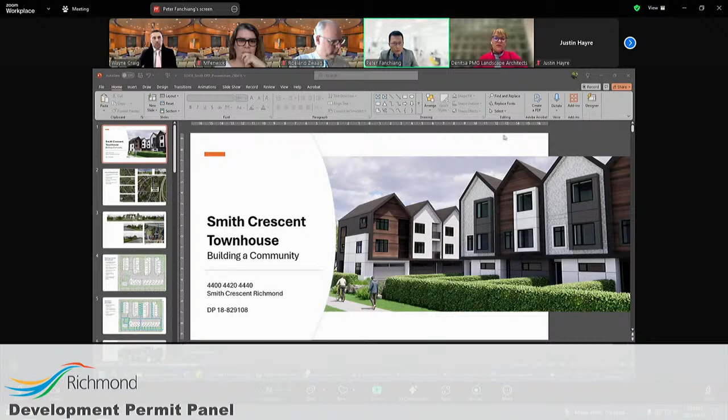My name is Peter Fanchiang, architect, AIBC, and good afternoon, thank you for the opportunity to speak with you today. I'm here to present our proposed townhouse project, let me share my screen right now. Okay, thanks, we can see it. So everything is all right? Yes, thank you, great.

I believe this project will not only contribute to the city's goals around increasing residential density, but more importantly, will help create a beautiful, family-oriented community for 34 families. This project is designed with people in mind, and it's about building a place where families can truly thrive.

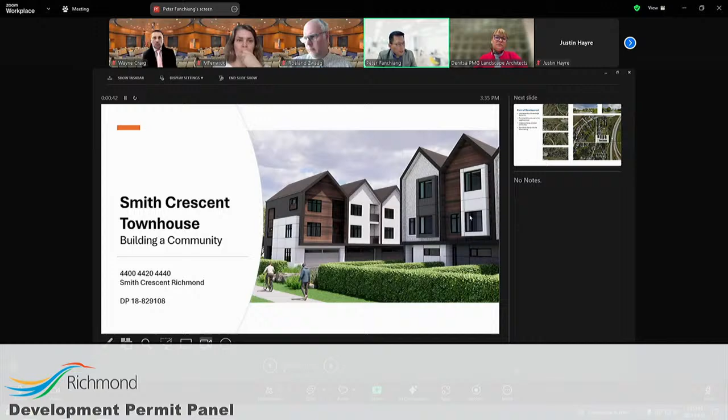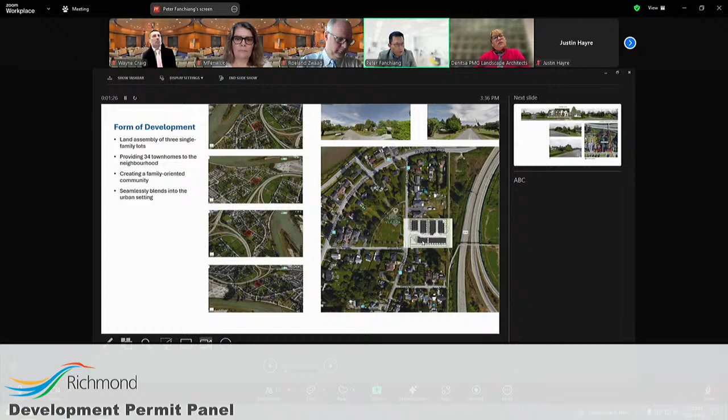There's also Hamilton Park here, so pedestrians can truly walk around this project. These are some street views, and we provide a key pedestrian connection between Hamilton Park and the trail path on the east side of the project site.

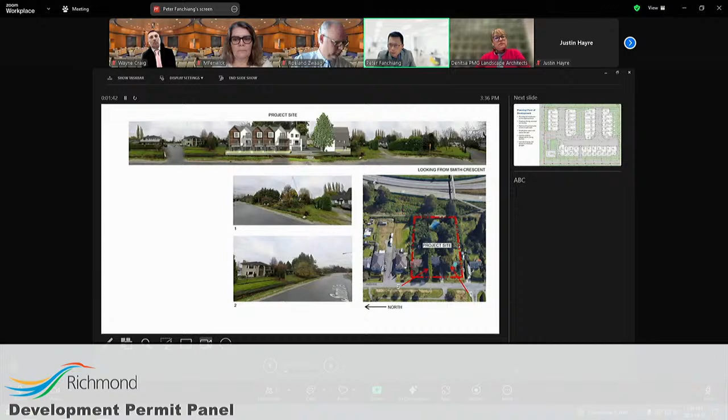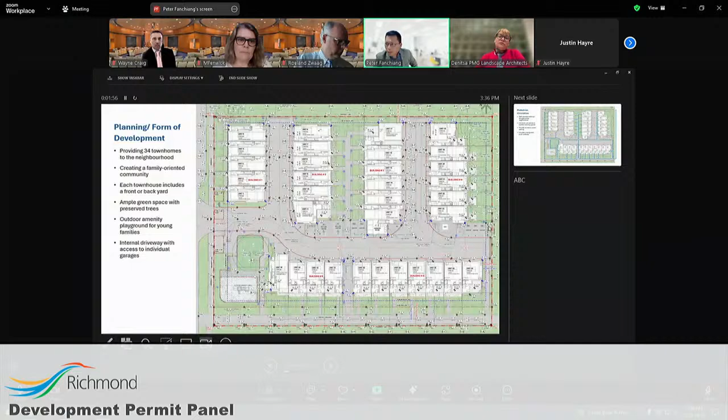So this is a site plan. We have an internal driveway that provides vehicle access to each individual garage, and internal pedestrian walkways are designed with contrasting paving colors for clarity and wayfinding.

You can see that residents can walk around the project and through the community. We've considered how to bring people in, so they can walk through each townhouse unit, with the circulation path indicated by the blue arrows.

This is a 3D view looking from Smith Crescent, which is the main entry of the community. The internal driveway comes from Smith Crescent into each individual townhouse unit.

We also have central garbage rooms for easy access for waste management, and the outdoor amenity space includes a playground for families and children, here. There's also pedestrian-oriented lighting for safety, including street lights, bollard LED lights, and wall-mounted sconce lighting throughout the community.

Each home has its own private front yard, located on the opposite side from the parking garage, so it's pretty much separate and people can enjoy quality time in their front yard without seeing vehicles traveling and entering the parking garage.

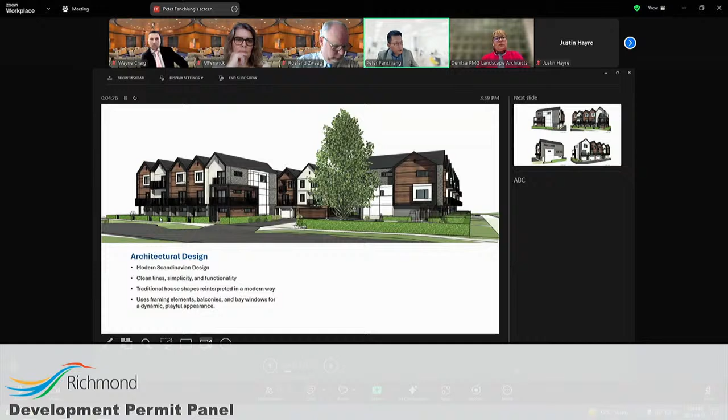This is also looking from the main entry from Smith Crescent into the community. You can see the big trees are preserved here, with an amenity space and playground for families, and a front yard fronting Smith Crescent.

Some 3D views showing the architectural language with two different color schemes: one lighter scheme, more like white shingles, and another darker scheme with more wood textures.

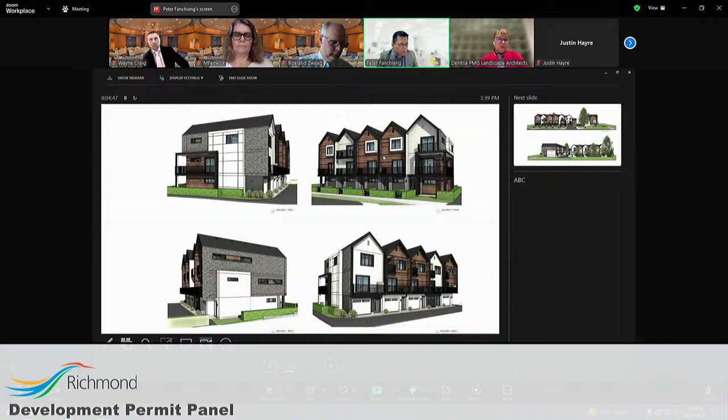Based on these two color schemes, we made a visual arrangement so that each building, from building 1 to building 6, has its own character.

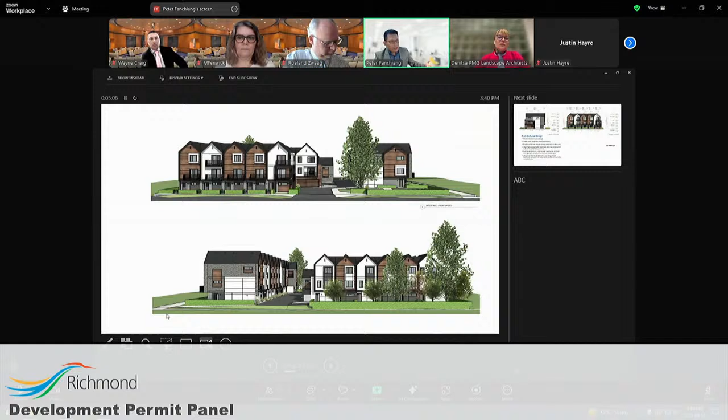This is looking down from the main entry, and this is on the opposite side. From the east side of the property, this is the trail.

Now introducing the elevations from building 1 to building 6. Based on similar language and elements, we created an arrangement with different patterns—dark color scheme, lighter color scheme—creating different visual interest.

Some units have bay windows, and we have different configurations of balconies.

Although they share the same language, based on this arrangement we made each building have its own character, and some units have slightly different window designs to give them more character.

This is building 4—although it has a bay window, it connects from level 2 to level 3. Building 5 is slightly wider than the other townhouse units, with a slightly wider bay window design.

Material-wise, the design focuses on a minimalist architectural approach, with emphasis on durability and sustainability: wood grain fiber cement siding and shingles, and a Scandinavian-inspired color palette. The lower level will be ledgestone, and the upper level will be pre-framed with the same architectural language, with slight variations to make each unit different.

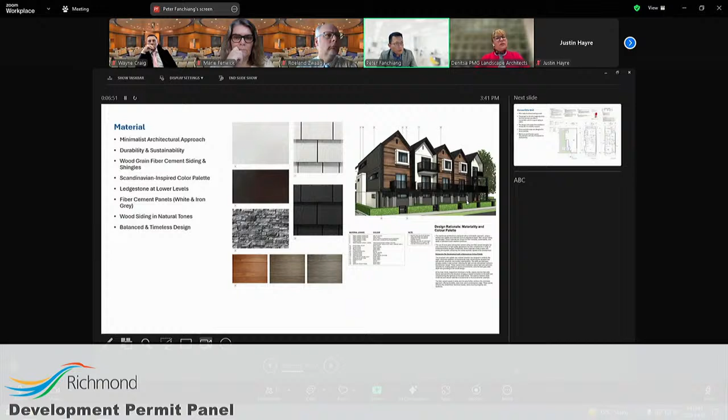We also considered senior residents in the community, so we have 3 convertible units supporting aging in place, accommodating and complying with accessibility space requirements.

These units are slightly bigger than the typical townhouse units, and the spaces were designed to comply with clearances for wheelchairs and accessibility doorways, and most importantly, we have a stair lift.

The stairs will be able to accommodate future renovation to add a stair lift, so the senior person can sit on the stair lift equipment to travel from level 1 to the level 3 bedrooms.

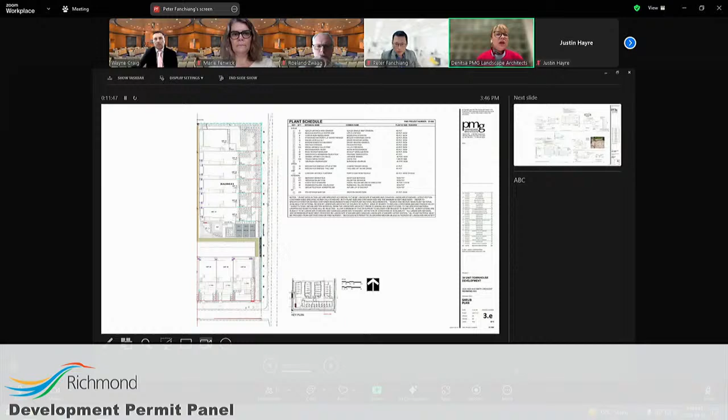Sorry, Denitsa, if I could just interrupt. Do you have a blow-up image or a different slide that would have more detail? Yes. Peter, please, could you go down? We have an enlargement up. Yes, okay, yes, it's black and white.

So we chose actually play equipment which is wheelchair accessible, and multiple kids can use it. The age range is between 18 months to 5 years old.

And because we are providing that log sitting type area, even older teenage kids can use it at the same time. So it's a pretty big play area with multiple activities like sliding, climbing, imagination, balancing, or just socializing.

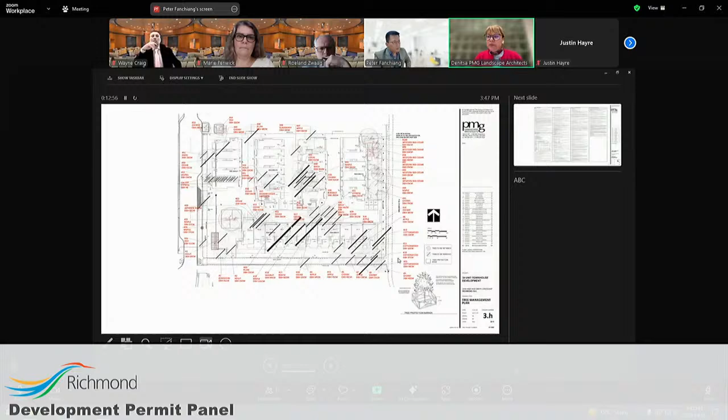Permeable pavers in 3 different colors have been used for the driveway and for visitor parking spots, which again soften this big paving area and divide it into different sections, providing more visible pedestrian access between the amenity space and some units' entrances, and the mailbox location.

And this is pretty much everything for the landscape proposed for this project. I'm open for questions. All right, thank you very much.

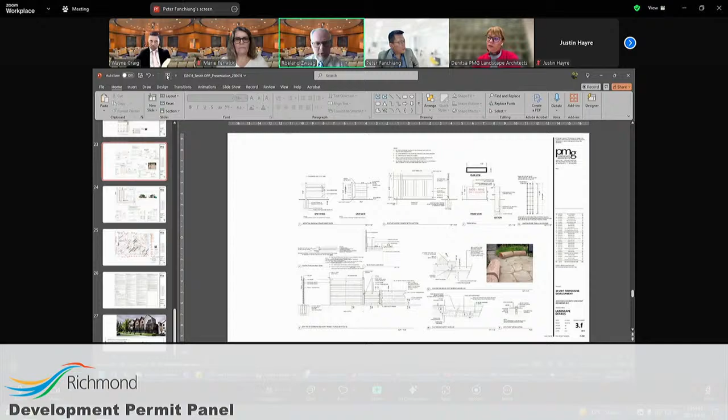When you mentioned fencing on the west side, looking at the rendering, the west property lines are essentially the end of the backyards or front yards, so I didn't understand why a 6-foot fence would go there. Oh, west, east side? East side, okay, sorry, yeah, east. If I said west, my apologies. East side. Yeah, absolutely, yes, thank you.

A follow-up question: you mentioned a retaining wall. That retaining wall is at the end of the 6-meter strollway, and it's going to be removed when the property to the south develops.

I'm seeking clarity on what's proposed and why a retaining wall is needed, or whether it's existing. It's been designed by civil engineering, as at this moment there's a grade change between the two sides, and our site is a bit higher than existing grade. We're proposing a small retaining wall to retain safety and divide the property line between the two sides, which is why we're providing 1 meter fencing along the south.

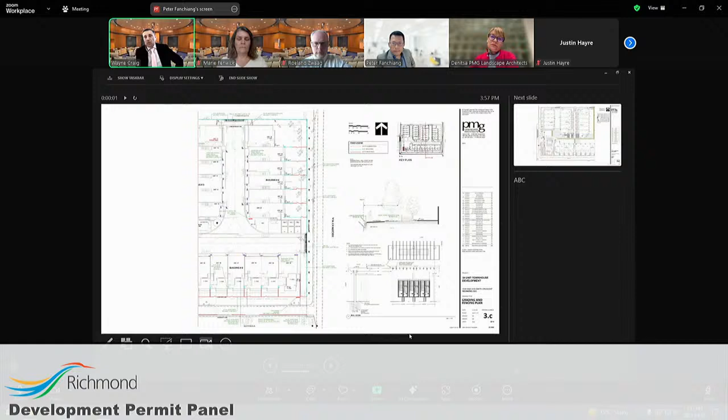Josh, maybe if I could ask you to comment on the strollway along the south property line, how the existing condition would be through this development, and then how that would be changed in the future, and if with that you could just confirm that the walkway itself will be fully accessible from Smith Crescent to the trail on Highway 91.

Through the chair, the retaining wall proposed is along the south property line of the current property. Upon redevelopment of any of the lands to the south, those lands would also be raised in order to meet the grade of the proposed walkway on the site.

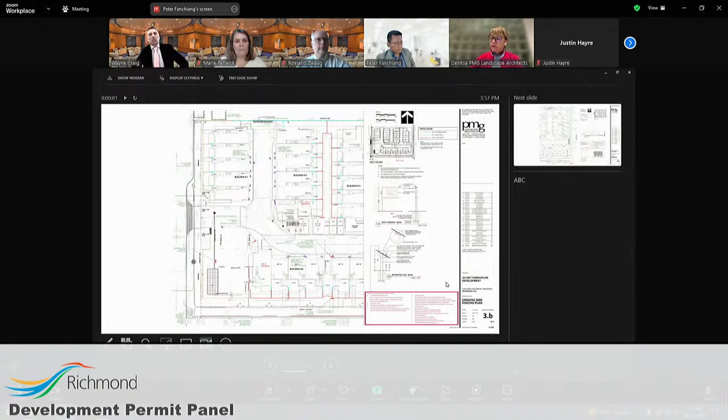The strollway is envisioned as having an ultimate width of 12 meters. There's a 6-meter wide SRW being provided on this property, and that would be expanded by 6 meters on the property to the south to have an ultimate condition of a 12-meter wide strollway connecting between Smith Crescent and the Highway 91 trail, all at the same grade and level. There would be no change in elevation that would require any steps or ramps.

And the fencing that's proposed now is essentially for the privacy of the adjacent property to the south, while it is maintained as a single-family residence, correct? That's correct.

Roeland, does that answer your question? Thank you, Mr. Chair. Thank you to staff and the applicants.

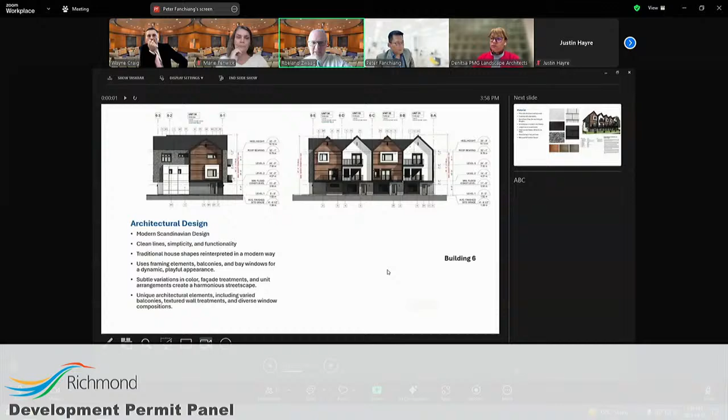One final question, I think the architect mentioned a central waste location, but I don't know if I understood that clearly because I don't see that on the drawings either. Okay, that's actually right here.

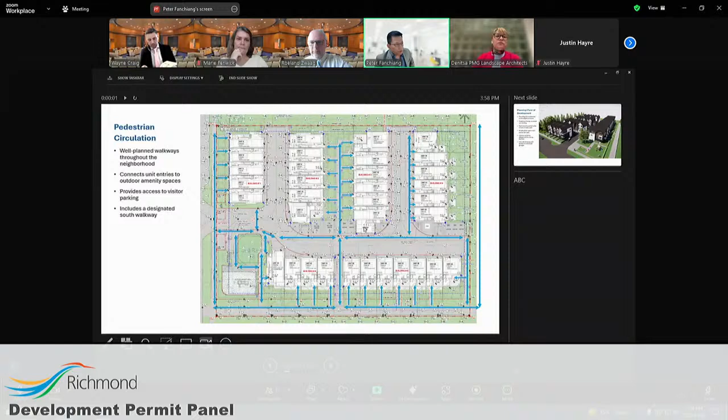So there's building 1, 2, 3. It's at the very end of building number 3. And if you see from this rendering, so it's right here. Okay, thank you, it's an enclosed area. Thank you so much.

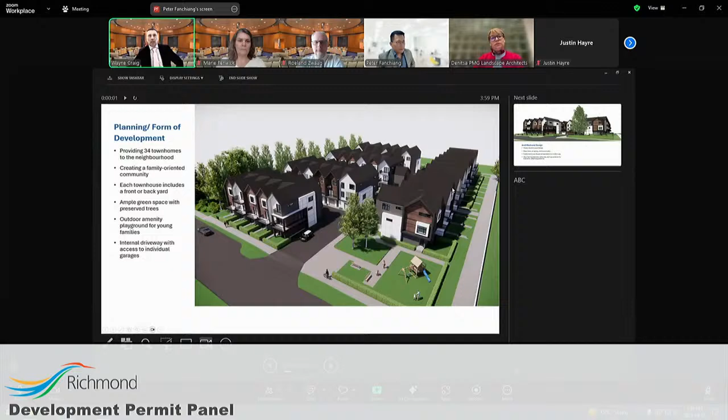I do have one question in relation to the landscaping, and I'm looking for some comment from the landscape architect. I appreciate the efforts made to retain the existing focal tree adjacent to the amenity space, the existing trees in the northeast corner of the site. I'm just wondering if you could comment on how the retention of these trees is limiting your ability to provide additional on-site replanting.

This project has quite a low lot coverage. There seems to be a tremendous amount of green space being maintained, but we are providing a number of the replacement trees through a cash in lieu contribution. So I'm just wondering if you could comment on how the retention of those trees is placing or influencing your replanting plan.

For areas in the tree protection zone, we are retaining the existing grade, and we are removing a 6-inch maximum by hand of existing landscape, and planting small size plants. Under the trees we have an existing lawn, it's not very well developed over the years. That's why for those units, for building 4, we are providing a patio area which owners can use, and the rest is planted or we are replacing.

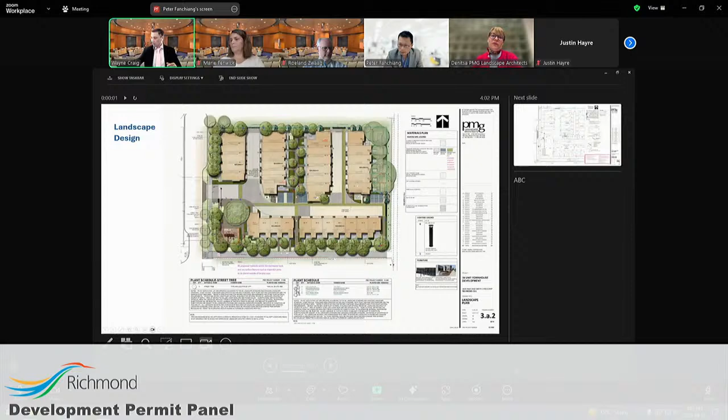I understand we have an interested party that would like to potentially address the panel. Yes, Mr. Chair, there's a member of the public here wanting to delegate on this item. All right, if you could welcome them to the podium and just ask them to provide their name and address for the record and whatever comments they may have.

Good afternoon, I'm Gordon Hoy, and I am the property owner, my wife and myself, of the adjacent property to the south, 4460 Smith Crescent. We noticed last year, once the preload had been put in, that whenever it rained there were huge puddles in our backyard, and we couldn't use the yard anymore until that drained. It took a couple of weeks for this to drain.

What we're wondering is what is the company going to do to address the drainage issue of the added weight and therefore the push of the water to our side? Is there some kind of drainage, some kind of piping? We would like to know what their plan is for mitigating this problem.

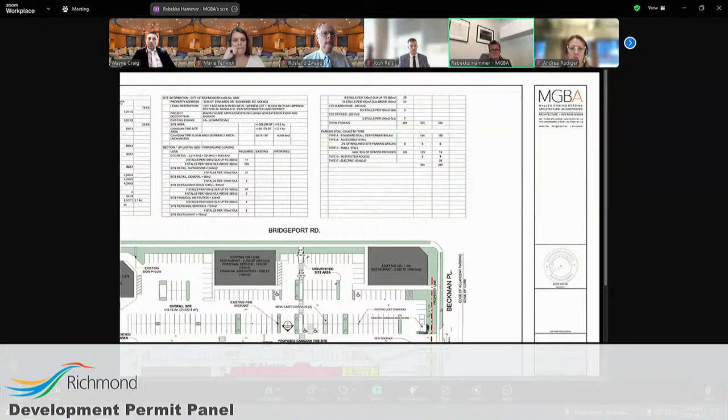The existing site, this is an existing drawing. Actually, I'll go back to that. Sorry, I don't use Zoom very often, so I apologize.

This is the site, the proposed work. We've introduced new pedestrian crossings. The bulk of the work has been addressing this parking field out front, adding landscape and accessibility connections throughout the site, and allowing for some e-com parking stalls out front, and then additional bike parking provided here.

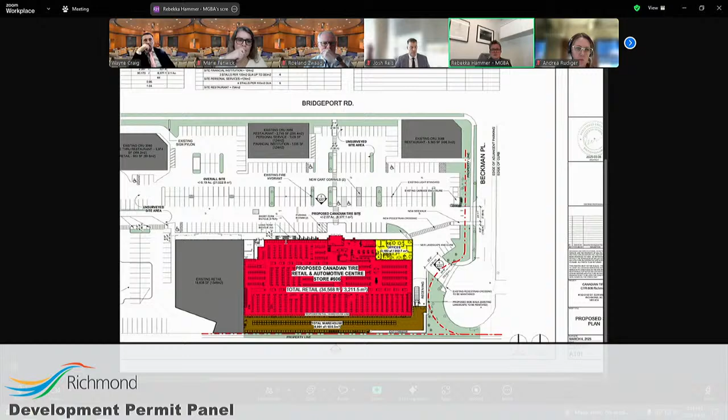The facade improvements are, again, keeping with that Concept Connect design guidelines. Moving from left to right, the loading will be reworked to provide a recycling compactor, and then maintain the truck bays for truck loading.

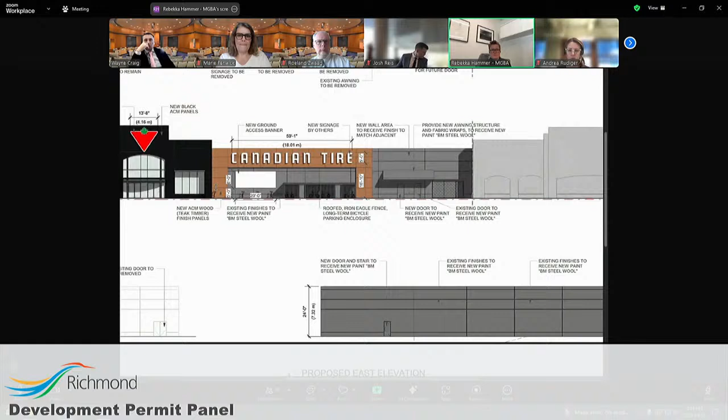The provision of awnings: currently at the Brick, there are awnings, and we understand that this is a requirement. There are some typical Canadian Tire signage, mounted here. The entry feature, the Brick entry feature, would be painted in our standard black with a nice logo up above, and then moving this wood element to the right of the building, and tucking in the bicycle parking, both secure and typical racks.

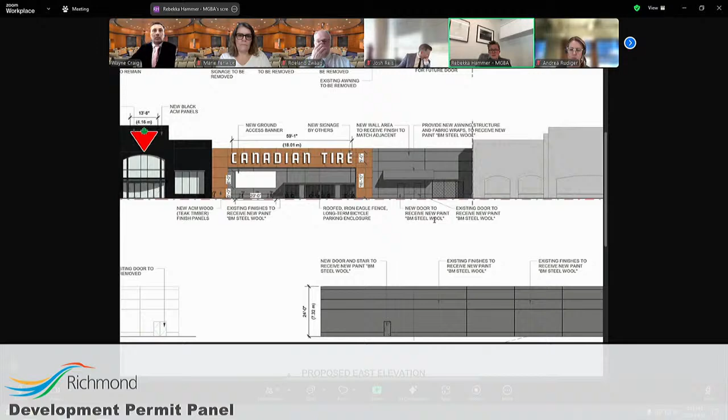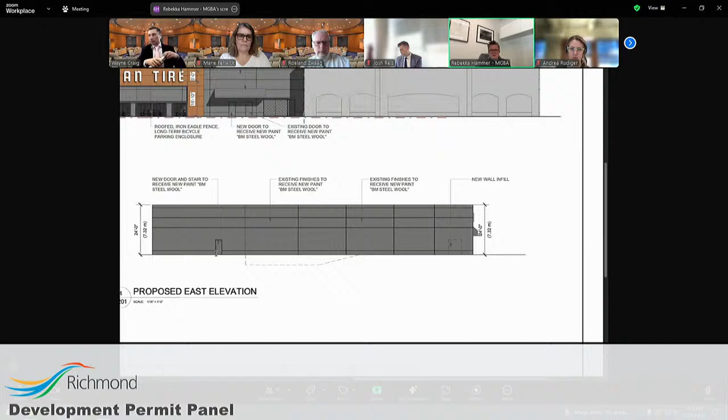Here, the east elevation remains unchanged, with the exception of a new door to provide exiting for the rear of the building. We found that the exiting distances required the provision of a new exit at the rear. And then there is an existing door here, which would be infilled. On the rear of the building, new signage and new paint. And that's the extent of the facade work.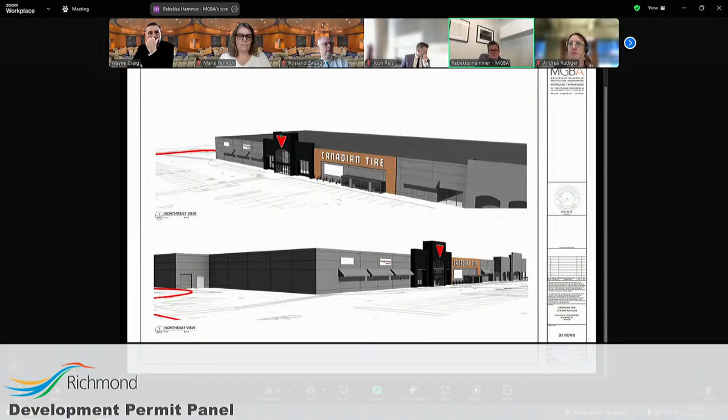I have a couple of renderings here showing the approach. And then here is the proposed landscape work. To allow for the Canadian Tire standard truck, we were required to cut back the curb here, and that's where you'll see the loss of these trees. It was just for the clearance around the corner, to make sure we weren't infringing on any street parking. And then the new parking islands with trees, I believe they are deciduous, and then there are some shrubs and lower, smaller scale plantings. This work is proposed in the areas directly surrounding the store.

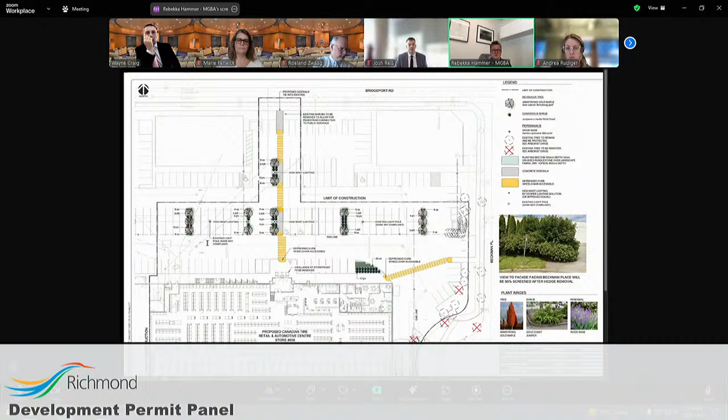Now, I wanted to zoom in on... apologies.

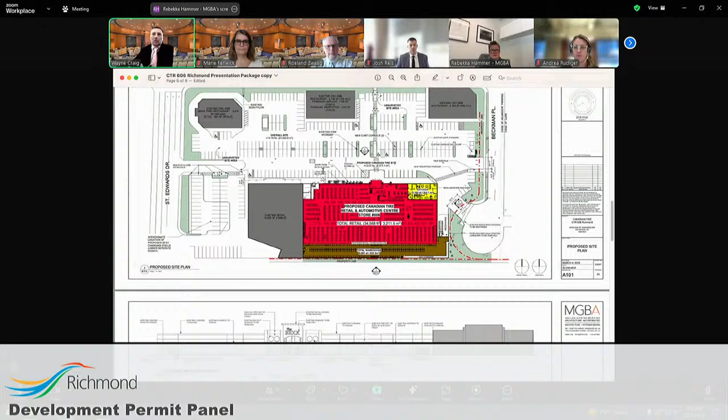One of the requests during our discussions with the city has been maintaining accessible clearances from east to west. So we have introduced a new crosswalk with curb let-downs. We actually took out parking and enlarged this front pad area to allow for wheelchair access through there. The bicycle parking and lockers all provide that minimum 1.8 meter width.

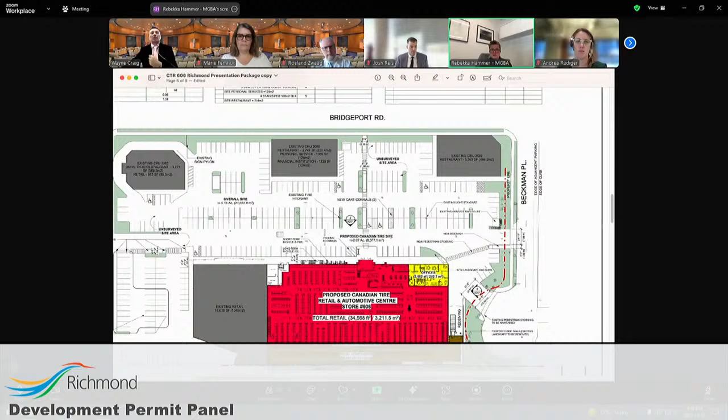And then as far as continuing that path all the way to St. Edward's, likewise there was no path here before, but we're proposing bringing one through here. And that is the extent of my presentation. Thank you very much.

I think we have a good picture as to what is being proposed.

Josh, any staff comments? Just a few comments, if I may, Mr. Chair. So landscaping improvements, as indicated, are proposed within the parking areas. This includes the planting of 14 new trees on site. In addition to widening some of the sidewalks and creating those connections north, south, east, west through the site, the applicant has worked with our staff to ensure that those pathways are accessible, including removing existing curbs and bollards to improve accessibility to the site.

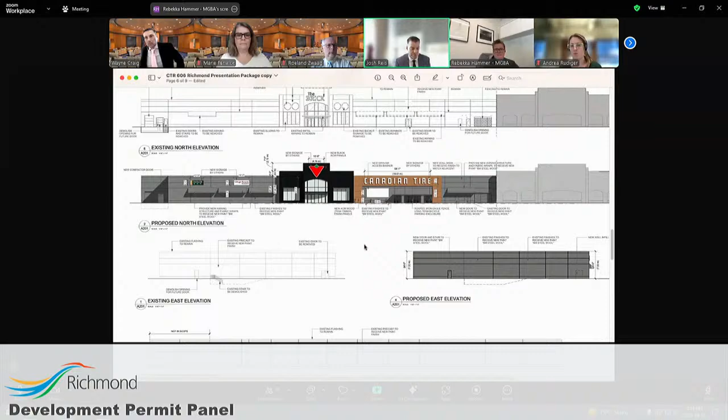Business signage, as shown on the plans, does not form part of the development permit and is subject to a separate sign permit application and separate city review. There is a servicing agreement associated with the proposal, as indicated, in order to modify the southeast driveway let-down adjacent to Beckman Place. Any of the works included in this area, as well as any other building improvement works within the area covered by permits by third parties, such as Pembina, will require approvals prior to those works taking place.

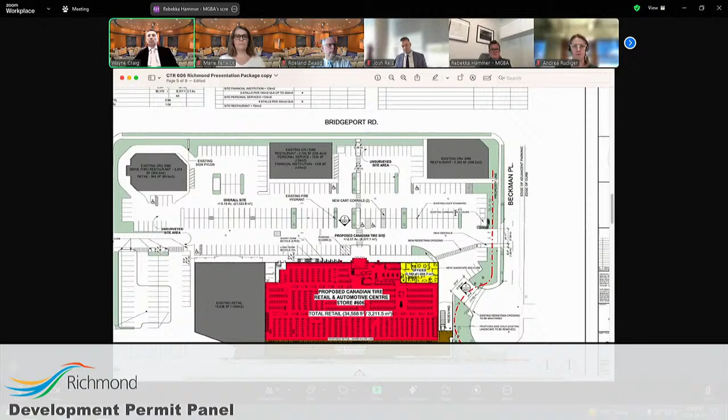All right, thanks Josh. Rebekka, you could stop sharing your screen for the moment. Okay, Marie, any questions for staff or the applicant? No, thank you for your presentation. I don't have any questions.

Just one question, Mr. Chair. Is there opportunity to install EV chargers as part of a process like this? Is it that the existing parking lot already has one? Yes, actually I do have another drawing. There'll be 25 or 26 EV chargers installed in the northeast corner.

Okay, and I noticed, my last question, there was some loss of parking for some great reasons. Overall, does the site still meet the general parking requirements for commercial or the zoning? I believe they are requesting a variance, but I will ask your staff to confirm. Apologies, there is no variance associated with the proposal. The project does continue to meet the required parking needs on site.

Also, with respect to the EV charging, not included within Canadian Tire's lease area but west of the existing building, I believe there is a proposed initiative to install a number of EV charging stations. That project's already underway. Thank you, Mr. Chair, no further questions. Thank you for the presentation.

Thank you. I don't have a question so much as a comment. I really appreciate the attention to accessible pathways. It is one of the objectives of the city to ensure that we are as accessible as possible. I just encourage your team, if you have not already started to work through the Pembina approval process, that you do so. It can be quite cumbersome, I understand, and that process will be needed prior to the improvements to Beckman Place as well as your building.